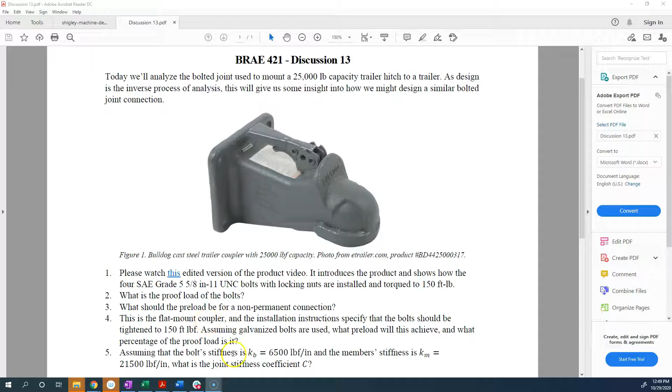It says the torque is 150 foot-pounds, and we were taking a look at what the joint stiffness coefficient was going to be, and then what the tension in the bolt would be if it's pulling a load up a grade. So in order to figure out the total tension in the bolt, you need to know that joint stiffness coefficient. And in order to do that, you need to know the stiffness of the bolt and the stiffness of the member. So let's look at how to do that.

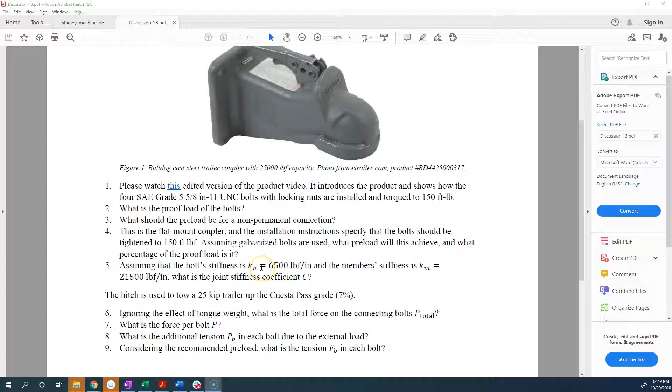So here's a diagram of our situation. We've got a 5/8-11 SAE grade 5 bolt that is going through, we'll say, a washer. It's not shown in the video, but I'm going to include one. It's a good idea to protect that fillet under the head of the bolt. Then there's the hitch itself, and that's being bolted to the trailer, and then we're going to have a nut on the far side. Both the hitch and the trailer are each 1/2 inch thick, and they're made of steel, and first we're going to figure out what KB is. That's the stiffness of the bolt.

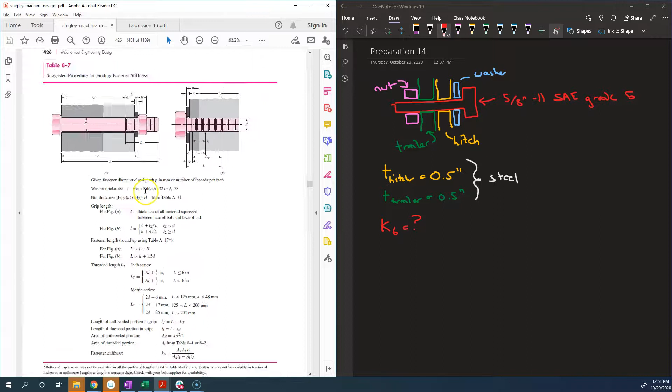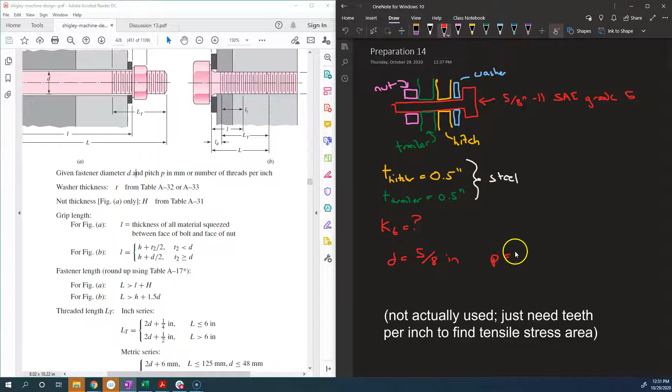So what is KB? This page of Shigley is your friend when you're trying to figure this sort of thing out. It gives basically step-by-step instructions for doing that. So if you're given a fastener diameter D, let's zoom in a little bit, and a pitch P, or number of threads per inch, we're going to have to figure what these are. So D, that's the major diameter of the bolt, that's 5/8 inches, and the pitch P is, well, we've got 11 teeth per inch, so the pitch is 1/11, 0.091. Okay, so we have that.

The next thing we need to do is figure out what the washer thickness is that corresponds with a 5/8 inch bolt. That wasn't given as part of the problem here. We know that these are 1/2 inch, but in order to figure out the total grip length of the bolt, which is going to help us figure out the stiffness, we're going to have to figure out how thick this washer should be. So there's a table in the back of the book, dimensions of metric plain washers. We've also got dimensions of American Standard washers. This is the one we want, and it gives typical washer sizes for different bolt sizes.

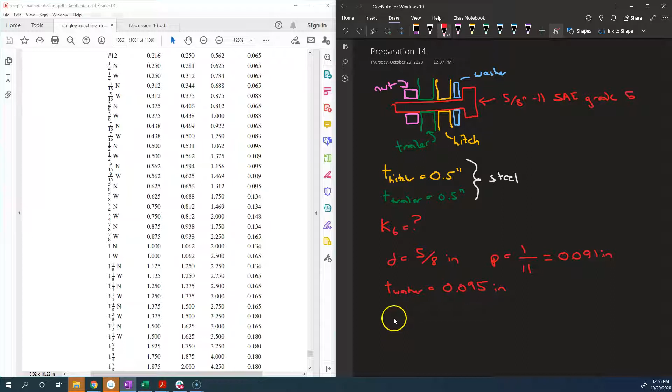We're going to look at the 5/8 inch. Let's do the narrow washer, 0.095 inches, and so we can use that. Okay, so we have the washer thickness. We also are going to need to figure out the nut thickness. And the reason we have to do that, what we're ultimately after is how long is the grip and how long is the threaded portion of the grip relative to the unthreaded portion. So we need to take those two different segments into account to figure out the total stiffness.

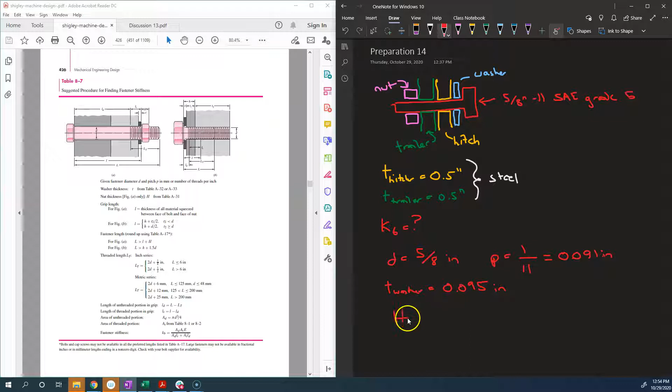But in order to figure out how much of the bolt is threaded, and therefore how much is in the grip, we have to figure out how long the bolt needs to be. In order to do that, we need to make sure that it passes all the way through the nut. So we need to know the nut thickness, H. We can also look that up for a 5/8 inch bolt towards the back of the book. So here are dimensions of hexagonal nuts.

We have 5/8 inch as the nominal size, and the height, H, for a regular one, we'll just use that, is 35/64. There might be some argument for using the thicker 23/32 one, because we are going to be using a lock nut. For right now, we'll say it's 35/64. Really, if you were analyzing this for an actual piece of hardware, you'd want to find the nut that you're actually going to use and figure out what its thickness is.

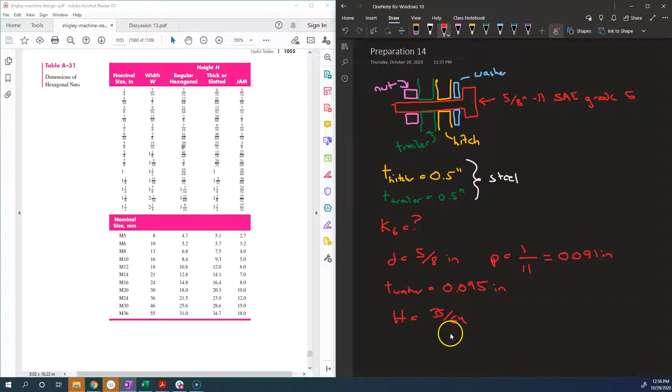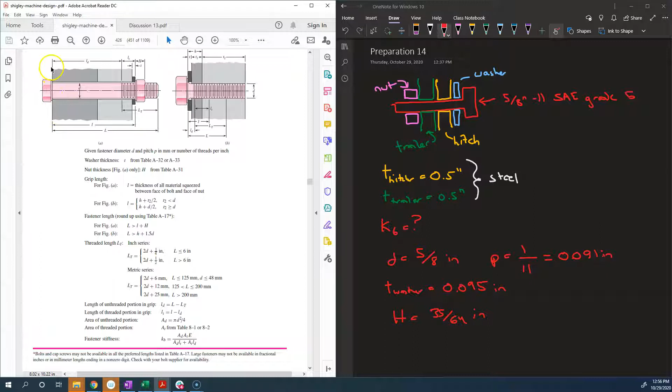So 35/64 inches. And now the grip length is all of the material that is squeezed between the face of the bolt and the nut. So in this diagram, it's everything between the face of the bolt here on the left and the nut on the right. In our diagram, it's everything between here, face of the bolt, and the face of the nut. So it's the thickness of the trailer plus the hitch, that's 1 inch total, plus that of the washer.

So our grip is going to be L is equal to, we've got the 1 inch from the trailer and the hitch, plus we've got the 0.095 for the washer, 1.095 inches.

Now, if you had a situation where it was a screw threaded into a part rather than a nut, then you can use these equations here. It suggests that the length is whatever h is, all the material that you're going through. So you're going through the washer in this case, you're going through another part, and then you're threading ultimately into this part. And it says to use, in addition to the washer thickness t and the thickness of this part, the total dimension h, you're going to go d over 2 further. Or if this part is really thin, if T2 is less than the diameter of the bolt, then you're going to do T2 divided by 2, half of that.

The fastener length, we need to find out what the length of the fastener is. We need to make sure it is greater than the grip, L, plus H, the thickness of the nut. You need to make sure that you get all the way through the grip and then also through the nut. It needs to be greater than that. So our L must be greater than L plus H, which is equal to 1.095 plus 35/64. That's 1.641 or 1.642. We don't need the rest of the digits because we need to be greater than that.

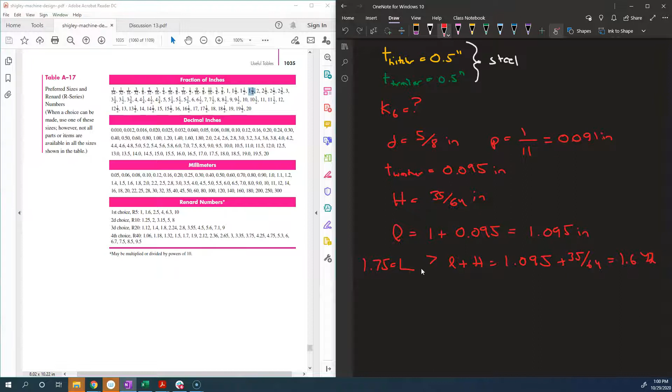We're going to choose a preferred size. It says round up using table A-17. Now again, if you choose the actual hardware, you should use the actual dimensions of the hardware. But here we're going to use preferred sizes that are in the back of the book. So table A-17 is preferred sizes. We have greater than 1 1/2 inch, but it's less than 1 3/4. So we're going to use 1 3/4. 1.75 is what L is going to be, which is greater than this. It's the first preferred size that is long enough to fit through the grip and through the nut.

So let's find the threaded length of an inch series bolt, which is what we have. If it's metric, it's a little bit different. If L is less than 6 inches, which it is, then we're going to use this equation. The threaded length is 2d plus 1/4 inch. So L sub t, the threaded length, however long the bolt has threads, is 2 times the diameter plus 1/4 inch. We've got a 5/8 inch bolt, so that's 10/8, 1.25, plus another 0.25, that's 1.5 inches. That is the length that's threaded.

Then the length of the unthreaded portion, all of which is in the grip, right? All of that is contained in the grip because the nut is on the end, on the threaded portion. The entire unthreaded portion up here by the head of the bolt is going to be going through the grip, which includes the washer and everything between the head of the bolt and the nut. So the unthreaded portion of the bolt that's in the grip, LD, is L minus LT. It's the whole length of the bolt minus the threaded portion.

So you could call this uppercase L. I think uppercase is the convention for the total length. L is the total length of the bolt. L sub T is the total threaded length. We're going to calculate also lowercase l sub t. That's going to be the portion of the threaded part of the bolt that's in the grip.

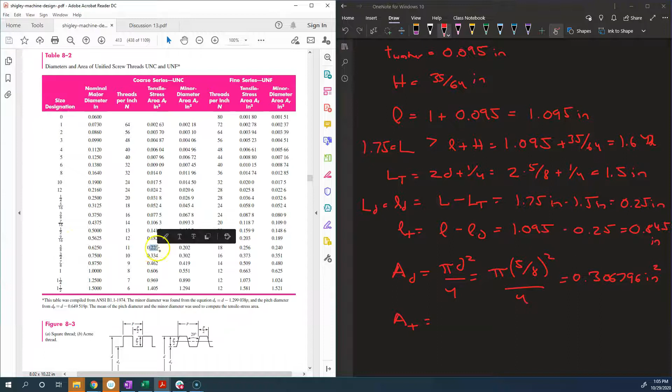And then the tensile stress area is the area of the threaded portion. You look up the tensile stress area from the table. Table 8-2 has it for UNC bolts. 5/8, 0.226 is our tensile stress area. So a lot of this is collecting numbers. I think we're nearly at the end here.

All right, our last step is to figure out the fastener stiffness. Let's see where this equation for fastener stiffness comes from. We can just plug and chug from here, but I want to show you where it comes from. It's just 2 springs in series, basically. And we're going to take a look at the deflection of the bolt in order to get there.

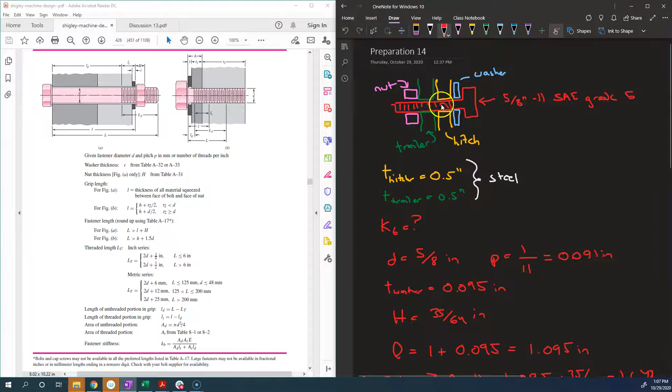So the total deflection of the bolt under a load is the deflection of the threaded portion, which we'll call delta T, plus the deflection of the unthreaded portion, which we'll call delta D, where the subscripts are taken from above to mean the threaded and unthreaded portions of the bolt. So how much does this part in the grip deflect, plus how much does this part in the grip deflect?

And the deflection of the threaded portion is, well, you remember PL over EA, that formula? That's the deflection of a cylinder under a load P. So if we've got load P, and this has cross-sectional area A, we need to know how long it is, and we need to know what the material stiffness E is. In our case, that is whatever our load is, which we don't know. We're finding this in general.

For our general load, we know that L is L sub T. It's the length of the threaded portion that's within the grip, because that's the only part that's under the load and is going to elongate. E is the material stiffness of the bolt, and A sub T, that's the tensile stress area. It would make sense to use that to see how long it elongates, because that's how we calculate the stress. Makes sense that we calculate the strain using that same area. Okay, so that is the deflection of the threaded portion.

We've also got the deflection of the unthreaded portion. That's P L sub D, the unthreaded portion within the grip, over E A sub D, the unthreaded cross-sectional area. And so delta is the total deflection. It's P times both of these things, LT over EAT plus LD over EAD.